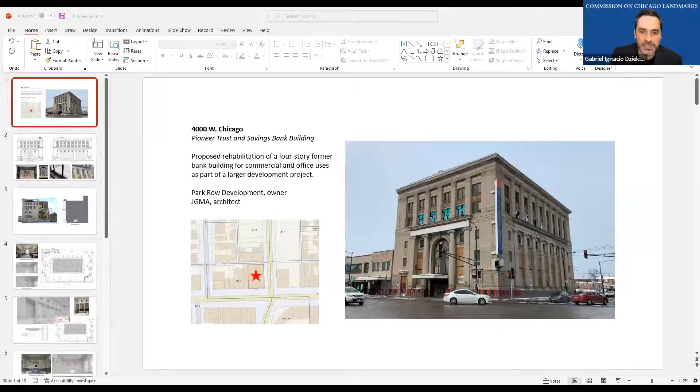And now here we go, we begin with our first project: 4000 West North Avenue, the Pioneer Trust and Savings Bank Building, Alderman Roberto Maldonado, 26th Ward, proposed rehabilitation of a 4-story former bank building for commercial and office uses as part of a larger development project. I believe Joyce Ramos has the presentation.

Thank you, Mr. Chairman. The former Pioneer Trust and Savings Bank Building was designed by architect Karl Vitzthum as a bank and office building with a gray granite base in the neoclassical revival style and was constructed in 1924.

It is a prominent site at the northwest corner of North and Pulaski Avenues. The bank building has sat vacant for almost 15 years. It is located in the Humboldt Park community area, and as part of the Invest South/West initiative, the building will be renovated as part of a larger development that will be a cultural hub and community center.

As part of the rehabilitation, the first floor banking hall will be retained to serve as an indoor market and event space, and the upper floors will be updated to serve as office spaces. The basement will be used as amenity spaces for the tenants. The significant...

historical and architectural features of the building are identified as all exterior elevations, including roof lines of the building, and the finished limestone return on the north elevation. Also the major historic interior spaces of the banking hall, including the overall spatial volume, columns, historic decorative floor, wall, and ceiling surfaces and detailing, historic decorative lighting, and the historic teller stations and check writing tables. Please note that the ordinance does allow for flexibility for the removal, relocation, or modification of significant features for the reuse of the building.

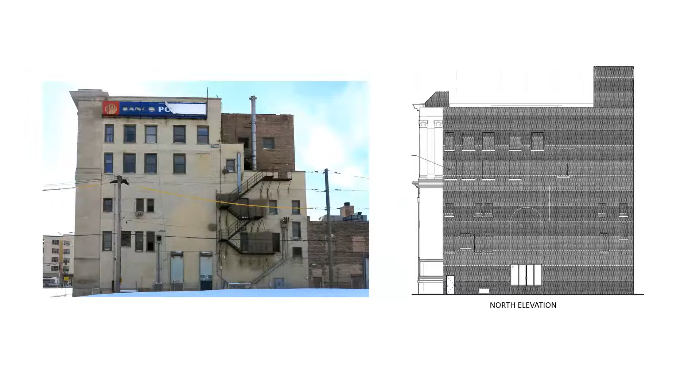Like many banks in the 1920s, the Pioneer Trust and Savings Bank had specialized interiors that included prominent teller counters, marble check desk, and geometric terrazzo flooring. Upon entering the building through the main doors along North Avenue is a short marble staircase that leads up to the 2-story banking hall that contains the historic marble and bronze teller counters, marble check writing desks, and the geometric pattern terrazzo floor. The plastered walls are finished to resemble weathered stone, and the coffered ceiling spans the entire space.

On the existing bridge that's within the South Apse, shown here on the photo on the left, a new code compliant glass guardrail will be installed inboard of the historic metal guardrail that faces north into the banking hall.

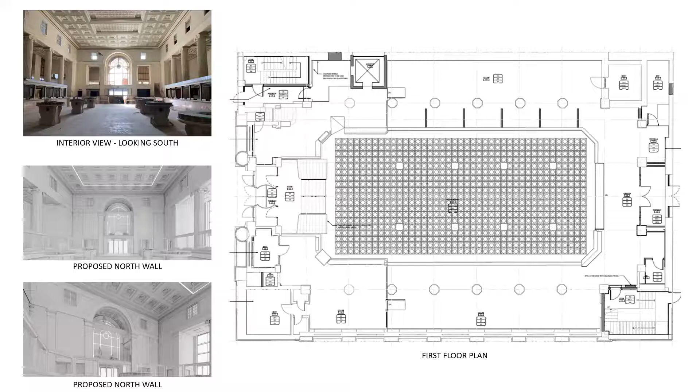For the first floor to be fully accessible, the secondary entrance circled here in the floor plan in red will be reconfigured with a new stair and elevator, highlighted here in yellow. It will be relocated to the north of its existing location. The architect had explored various locations for this elevator, but the proposed location provides access to all floors of the building while creating the least impact on the designated interior features.

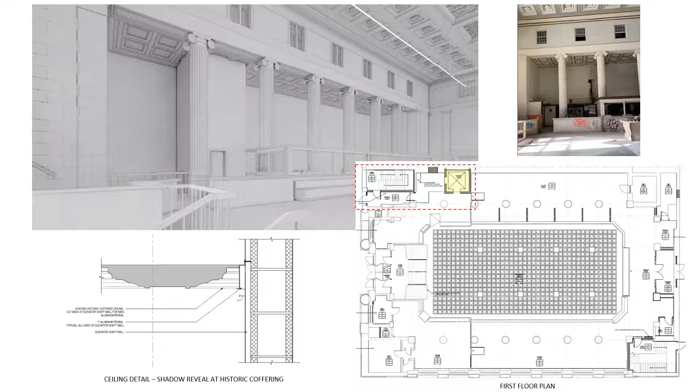The new elevator enclosure will penetrate the coffered ceiling, and a 1-inch reveal, shown here in the detail on the lower left, will separate the elevator shaft and the coffered ceiling. Staff recommends approval for this alteration.

A new bridge with glass guardrail, circled here in the red dashed line, will be constructed within the north apse to connect the east and west mezzanines. A portion of the historic coffered ceiling within the apse will need to be removed, and the width of this opening will be limited to 1 panel size.

Looking straight at the north apse from the banking hall level, this opening would not be apparent. However, the openings are visible when viewing from an angle. Staff recommends approval of these openings since they do not significantly alter the character of the interior space, and the glass guardrails do not obscure views of the walls behind it.

On the west elevation, the existing double hung windows will be removed. New punched openings will be made in the brick, and new windows are proposed to be installed on the 3rd and 4th floors. These windows will be visible from North Avenue above the roof of the neighboring buildings from the pedestrian level. The window openings are uncharacteristically large picture windows, and historic preservation staff recommends that the windows located on the second bay from the North Avenue elevation be reduced to have a similar opening size and window pattern found on the windows on the south and east elevations.

The windows on the west elevation located behind the recessed section can remain as proposed since they will be minimally visible from the public way.

To the north of the building are vacant parcels and an alley that is proposed to be vacated, which will be redeveloped into a multi-story building that includes parking, residential units, and shared community spaces. The new building will be located outside of the boundaries of the designated lot. It is not under the Commission's purview.

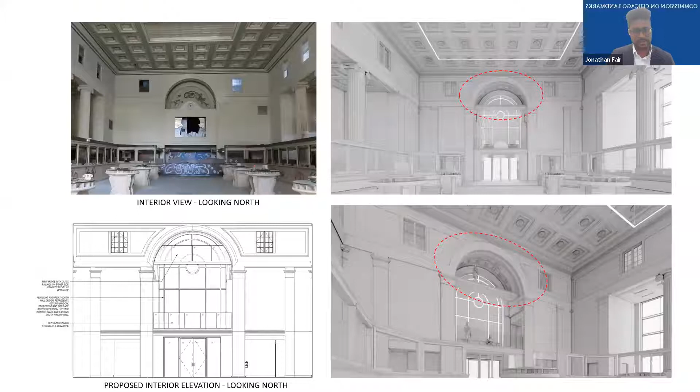I have maybe two questions. The first one being related to the southwest corner of the building where the stair and elevator are being reconstructed, with the roof access. I know the building as is has the existing penthouse at the roof, but from some of the historic photos, and even if you're out there now, I think it's only 8'6" or so, as documented in the drawings, that elevation is above the cornice.

Didn't see an elevation for the new penthouse that's going to be constructed, and just wanted to see if there was an elevation known, and just making sure, ideally if that's something from street view is hidden a little bit.

Yes, there are elevations that the architect did provide for these rooftop enclosures. The rooftop enclosures are just big enough for the stair and the elevator, and it's no larger than code required. So it would be visible from the street level, but since it's no larger than what's required by code, we do allow for these rooftop enclosures where they're proposed to be located.

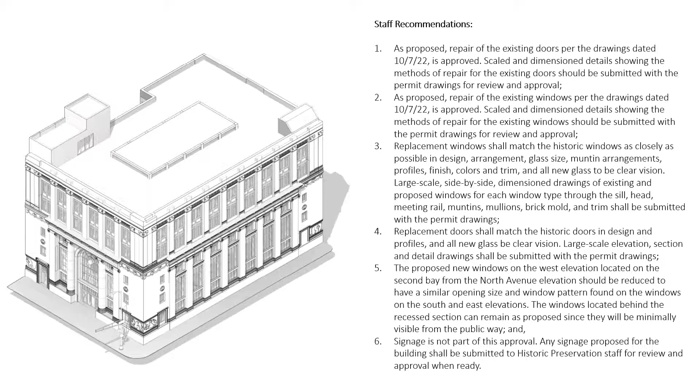Okay, I'll have to check back on that elevation, but thank you for that.

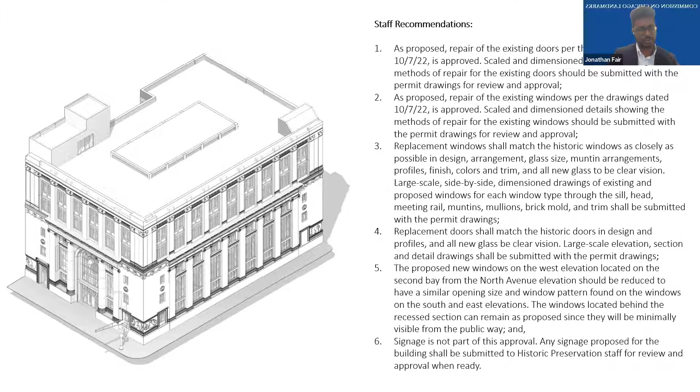The other point I made was more so of a comment, because I acknowledge and respect that it's out of our purview, but just acknowledging the significance and the prominence of this building along North Avenue and Pulaski, for the forthcoming development that's happening to the north. Keeping in mind not only the north elevation, but as you're approaching from Pulaski, the relationship between the existing structure and the development that's forthcoming.

I think what you all are setting up is a really nice language or dialogue of new and existing. I think some thoughtfulness there could go a really long way, but otherwise really, really exciting work.

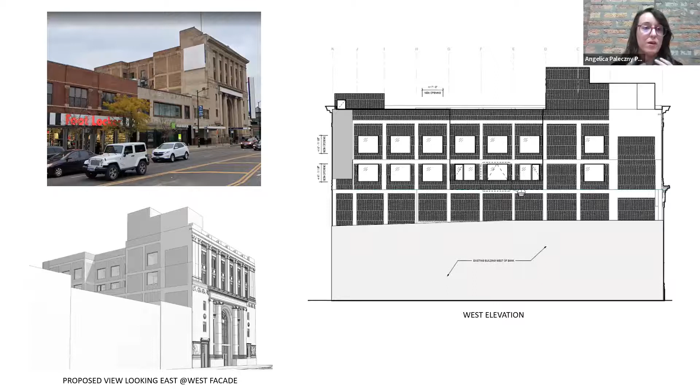I think that's a really great consideration. For us, the importance is making it a functional, bright, and lively office space, so the addition of the mullion is definitely something we can consider. Great, thank you.

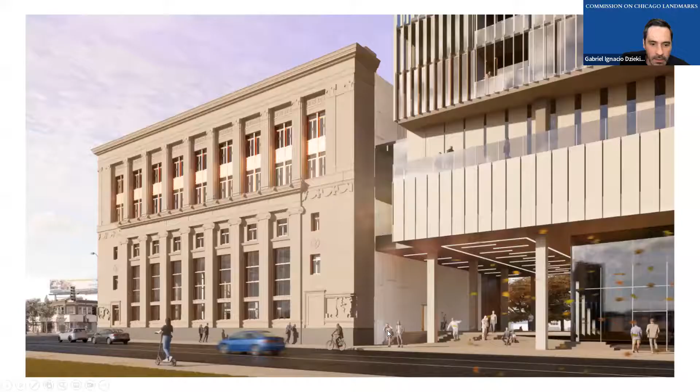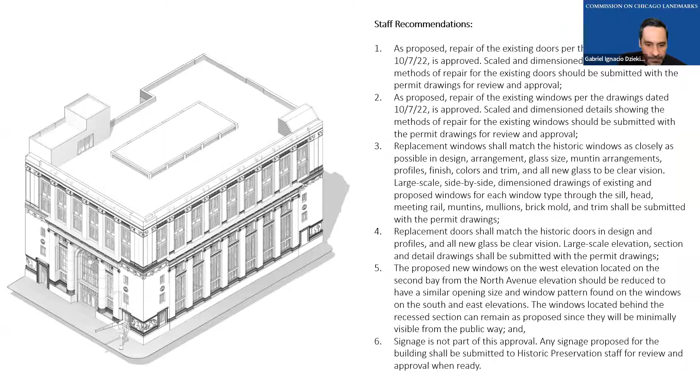Any other points of discussion, commissioners? Seeing none, I want to say this is a tremendous project and I'm excited to see it realized. Wonderful job, and it's exciting for the firm as well, for JGMA. Congratulations on getting this far.

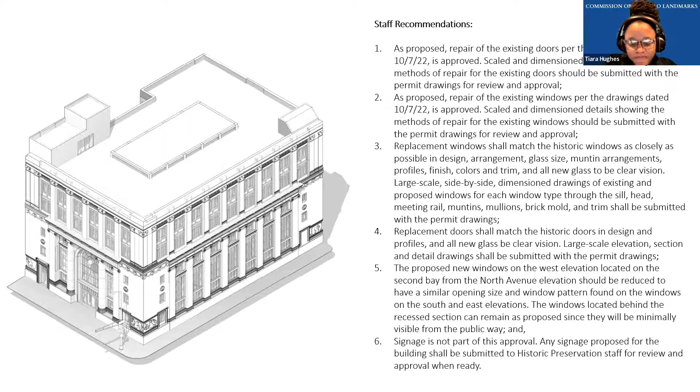If there's no further discussion, I'd like to request a motion to adopt the staff recommendation. It sounds like we have a compromise on the one bay on the west elevation. I motion that we accept all staff recommendations, including the mullion adjustment to the window discussed today. We have a motion—commissioners, do we have a second? I'll second it.

Seconded by Commissioner Rubin. We'll do the roll call. Commissioner Fair, yes. Commissioner Fair is a yes. Commissioner Ponce, yes. Commissioner Ponce is a yes, and I am certainly a yes. The motion carries unanimously.

Congratulations and good luck, we really want to see this happen. So very exciting.

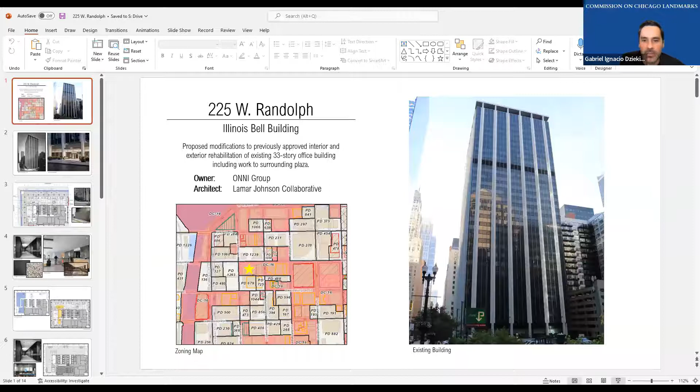The next project on the agenda is 225 West Randolph in the 42nd Ward, the Illinois Bell Building, Alderman Brendan Reilly. The proposed modifications are to a previously conditionally approved interior and exterior rehabilitation of an existing 33-story office building, including work to the surrounding plaza. I believe Emily Barton has a presentation.

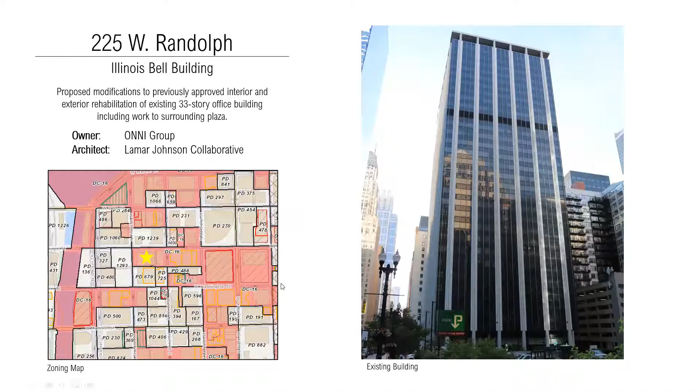Thank you, Commissioner. This is the Illinois Bell Building, an individually designated landmark. The significant features are all exterior elevations, as well as the surrounding plaza and the ground floor lobby. The owners are taking advantage of the Class L real estate tax incentive as part of their rehab project. In 2020, the committee reviewed and conditionally approved a proposal for the rehabilitation of the building, including work to the plaza and the designated ground floor lobby. The applicant is now proposing changes to the scope of work and has submitted revised plans for PRC review and decision. Changes include lobby modifications, a new rooftop addition with roof deck to accommodate amenity space, replacement of the building's vision glass cladding, and replacement of non-historic finishes in the plaza. I'll go through these changes now.

The original plaza paving was removed at some point in the past, and the applicant is now proposing to replace the existing non-historic exposed aggregate concrete pavers with new pavers matching the color and texture of the historic paving based on photographs. The new paving is proposed to extend out to the property line, outlined in blue, whereas the original stopped at the outside edge of the historic planters. The applicant proposes this change to further incorporate the historic planters into the plaza. Because the applicant will be creating a custom blend of exposed aggregate concrete, they have not yet received a final sample. Staff recommends that when ready, the plaza sample be submitted to staff for approval.

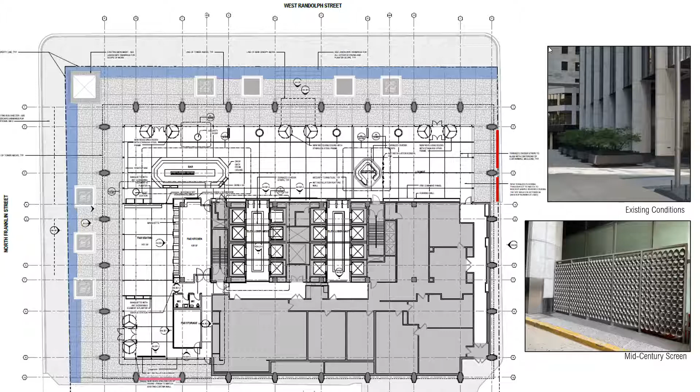On the east end of the Randolph elevation is an original exterior mid-century styled metal screen, lined in red on the map. This screen was installed to block views of the alley from inside the lobby. The applicant proposes to replicate this screen, shown outlined in pink, for the south end of the Franklin elevation to alleviate the same condition. Because this new screen will not penetrate or obscure any historic features and is proposed for the same reason as the original, staff recommends approval as proposed.

Volume and finishes in the main lobby have been substantially altered from their original appearance. The west end of the lobby has been partitioned into a separate restaurant space with non-historic partitions and finishes. The remaining lobby space along West Randolph was remodeled in 1989. The original black granite wall panels in the main lobby and elevator lobbies were replaced with marble and wood paneling, and new gray and black terrazzo flooring was installed. The lobby ceiling is a non-historic gypboard ceiling with floating gypboard ceilings in the elevator lobbies.

The revised scope of work eliminates the stair insertion that was proposed in 2020 and includes replacement of the existing gray and black terrazzo flooring with new gray terrazzo with a polished finish to match the original, as shown in historic photographs, with divider strips forming a grid that aligns with exterior structure and plaza pavers. The non-historic marble and wood wall panels in the main lobby and elevator lobbies will be removed and replaced with black granite to match the original, based on historic photographs and using the existing black granite at the base of the exterior columns as a reference.

The material proposed for removal is non-historic and the changes are based off of the original drawing set. Staff has reviewed replacement materials for this new flooring and wall coverings on site and recommends approval of the proposed stone sources: Cambrian black brushed granite and Amici Terrazzo sample AT2402.

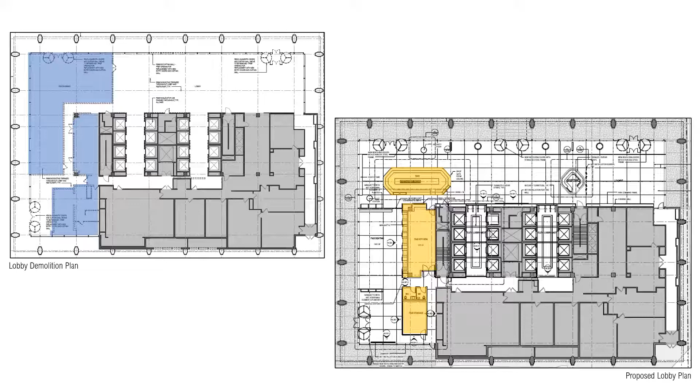Originally, the building featured a monolithic drop ceiling featuring a dramatic soffit at the building perimeter. The existing non-historic ceilings throughout the lobby and elevator lobbies will be removed and replaced with new drywall ceilings, returning to the original perimeter soffit and 12-foot height.

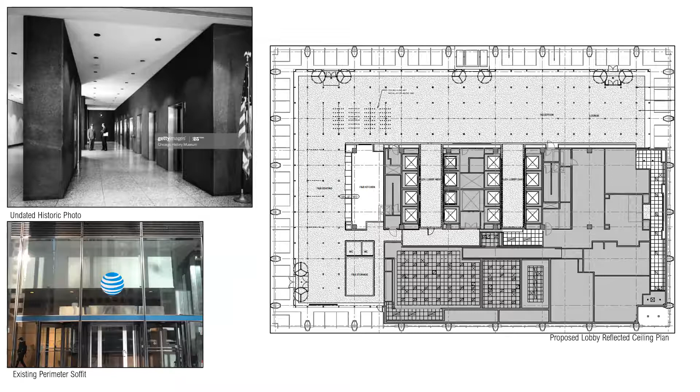Previously, the committee approved a new central building entrance along Randolph and a new canopy. The applicant is now proposing to replace the existing 7-foot tall revolving doors with new 9-foot tall revolving doors, largely matching the original design. Above these new doors, the applicant proposes a new curtain wall and mullions to match the existing in finish, reflectivity, color, and profile.

As before, at the Randolph Street facing side, a new center entry is proposed to funnel office workers directly in and up. Two new revolving doors matching the height and design of the other revolving doors are proposed to be inserted into the middle bay along the Randolph Street elevation.

This entry has been designed to fit seamlessly into the historic storefront and will sit below a new mid-century inspired canopy, approximately 1 foot 4 inches thick, which is thinner and less intrusive than the previously approved 2.5 foot canopy. The canopy is proposed to be structurally attached to the building floor plates and will cantilever out, which will avoid the need to directly attach to the historic exterior. Building address signage and downlighting will be incorporated within this canopy.

Staff recommends approval of all of these ground floor storefront changes with the condition that canopy material samples and details showing the profile and alignment of the new glazing and mullions be provided with the permit application.

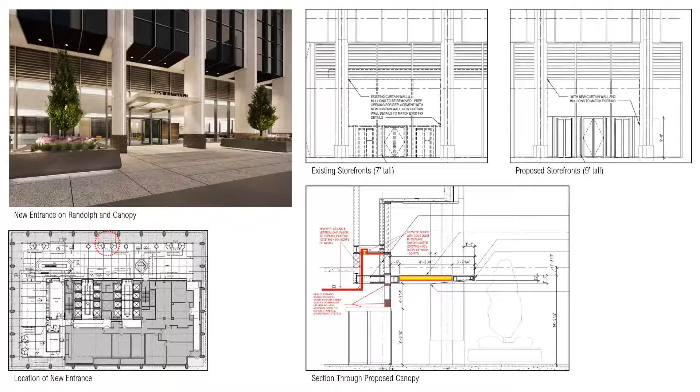Just to describe the existing curtain wall for you, the building features alternating rows of tinted vision glass and an opaque transom glass or spandrel glass.

As part of the new scope, the applicant is proposing to replace the entirety of the tinted vision glass on the building to increase energy efficiency. They provided proposed and existing details, including the original details from the historic drawing set, in order to evaluate the impact of replacement. All exterior mullions are to remain, and no modifications to the existing curtain wall framing will be required. The corner detail will be an identical match to the as-built condition, and the applicant is proposing to retain and reuse the historic black arrowhead corner extrusions and zipper gaskets.

There is a slight dimensional difference between the existing and proposed center mullion details. In the original, there is an approximately 1/2 inch to 3/4 inch caulk joint connecting the glazing to the center mullion. In the proposed detail, the window bar and backer rod and seal are closer to 1 1/4 inches thick.

A mock-up was conducted by staff to evaluate the visual differences between the original glazing and the new proposed replacement glazing, and staff determined that the 1/2 inch to 3/4 inch difference is not noticeable at all from the outside. Staff further found that the reflectivity, color, and finish of the new glass matched the original glazing very closely and recommend approval of the Alliance Glazing Technologies glass as proposed.

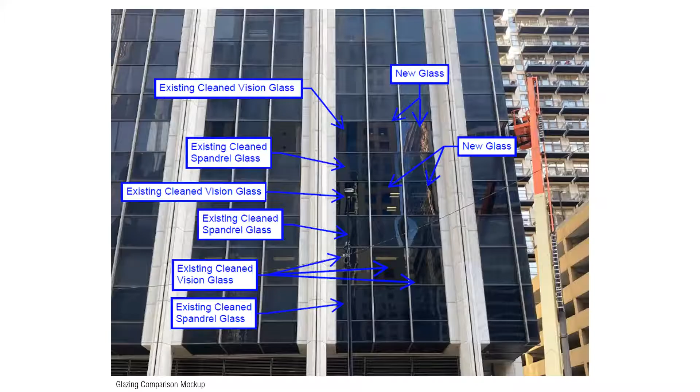The revised scope of work proposes to utilize a portion of level 31 for amenity space. To make this area functional for the proposed use, the existing louvers of the portion outlined in yellow will be removed and replaced with tinted glass. Because the louvers are recessed and are located at the top of the building, they read as a dark void. Therefore, staff recommends that the installation of tinted glazing will not be a noticeable change to the exterior of the building when viewed from pedestrian street level.

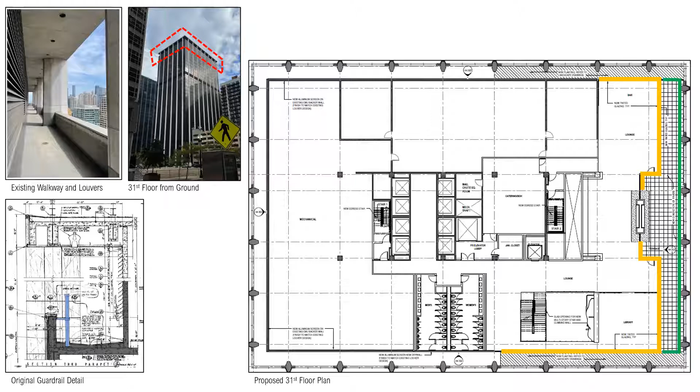A new metal and glass guardrail will also be installed along the parapet at level 31, shown in green, in the same general location and at the same general height as the railing that was shown in the original drawing set.

To accommodate more new amenity space, the applicant is proposing a new rooftop addition with roof deck. The addition will primarily be 14 feet tall, shown in yellow, and will be located on the south and east sides of the existing roof penthouse, shown in blue. The addition will be set back approximately 13 feet from the south edge of the parapet and 16 feet from the east edge of the parapet.

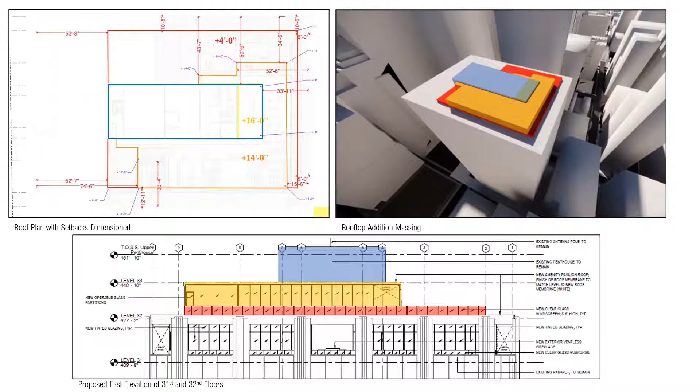A roof deck will wrap the east and north sides of the penthouse, set back 8 feet from the east and 10 foot 6 inches from the north. The deck is proposed to be surrounded by glass guardrails 3 feet 6 inches tall, shown in red, and a low maintenance 4-inch green roof tray is proposed to border the addition and deck on all sides.

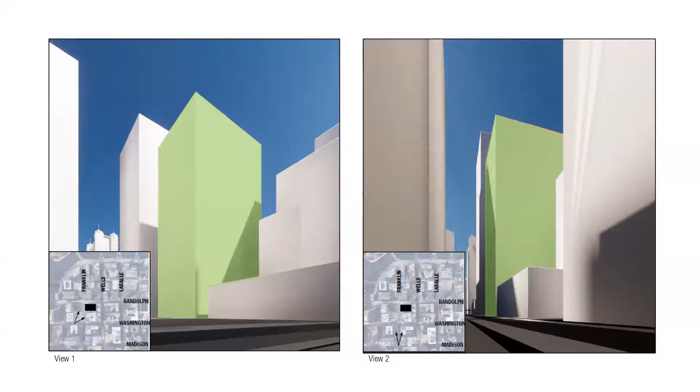Staff recommends that based on these visibility studies and the setbacks proposed, the new rooftop elements will not be an adverse effect to the building, and all proposed rooftop materials shall be submitted with permit application. A statement of no opposition has been received from Alderman Reilly's office, and I believe we have the development and architectural team here to speak if you have any questions.

Thank you, Emily, for the very clear presentation. Any questions for Emily before we go to the applicant? Commissioners? Seeing none, let's hear from the developer. Can we please hear from Brian Bradeur?

I had a question, sorry. Go ahead, Commissioner Hughes. My question was, was any of the work previously approved performed in 2020, or did everything stop, I'm assuming, because of the pandemic? I think the developer can clarify, but my understanding is that nothing was done. It all just kind of got stopped before the work could get started.

Brian Bradeur speaking for the Ani Group. We're the owner, developer, and general contractor. Thank you for having us. To answer the first question, we actually closed on the building in 2020, in early 2021. Some demo permits have actually already been filed, and we've actually already begun elevator modernization work and a couple other things. So work has already been done on this project. The reason we're back here today is just for the alterations set forward in the presentation.

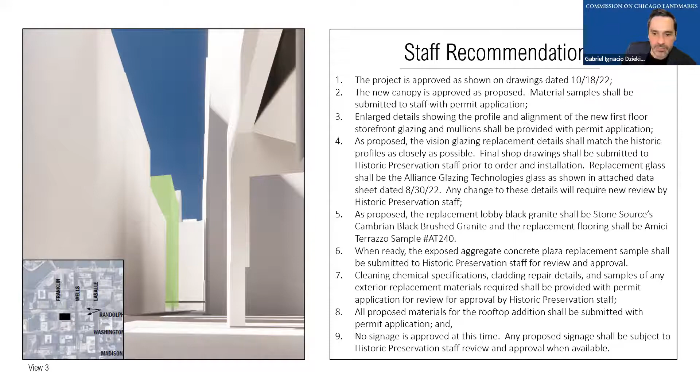Commissioner Ponce? Yes. Commissioner Ponce is a yes. Commissioner Rubin? Yes. And I am a yes, and the motion carries unanimously. Congratulations, and we look forward to seeing the project come to fruition. Thank you.

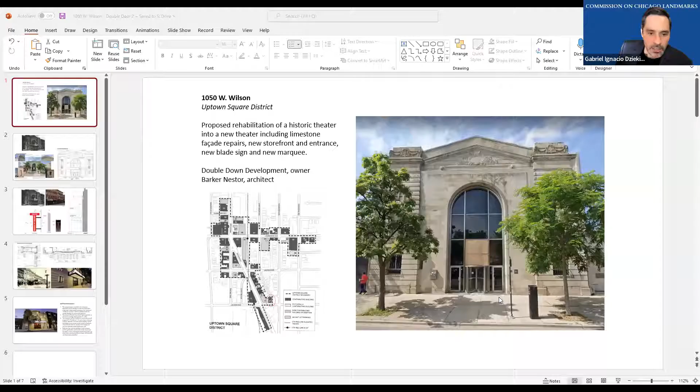1050 West Wilson is the next project, 46th Ward, Uptown Square District, Alderman James Cappleman. The proposed rehabilitation of a historic theater into a new theater, including limestone repairs, facade repairs, new storefront and entrance, new blade sign, and new marquee. Joyce Ramos has the presentation.

Thank you, Mr. Chairman. The Wilson Avenue Theater was erected in 1909 and was designed by architect Henry Ottenheimer in the classical revival style. It was the oldest theater in the district and was converted into a bank in the 1920s. After years of being used as a commercial space, the building will be redeveloped back into a theater as the new home of the Double Door Theater.

This is a contributing building in the Uptown Square District, located at the very eastern boundary on Wilson, just east of Broadway. The period of significance of the district dates from 1901 to 1940. The significant features of the district include all exterior elevations, including roof lines of the district buildings visible from the public right of way.

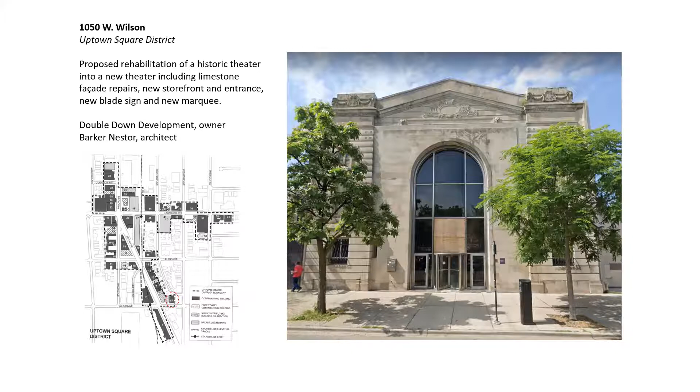The building's primary street elevation faces Wilson Avenue and is clad with limestone, which is proposed to be patched and repaired. A new storefront and entrance will be installed in the existing arch opening. Based on historic images, the building originally had a decorative limestone facade with a large canopy covering the entrance, and the facade was later modified to include an arched window opening on the second floor.

Historic preservation staff recommends approval for the replacement of the existing non-historic arched storefront system and entrance door within the historic opening, with all new glass to be clear vision glass. Large-scale dimension drawings of the proposed storefront and doors shall be submitted with the permit drawings for review and approval.

The applicant is proposing to install a 17-foot tall new blade sign with halo-lit letters and incandescent bulbs. The design is based on the original double door sign installed on the venue in Wicker Park, and it will be supported by steel tubes attached to the new storefront system.

Based on historic images, a historic blade sign was hung off the limestone facade in 1910 when the building was the Vaudeville Theater. Historic photos show a large clock and blade signs projecting off the front facade as well. Historic preservation staff recommends approval of the proposed double door blade sign to be installed in the same location, since there is historic precedent for signage projecting off the facade, and the attachment locations will not impact any historic material.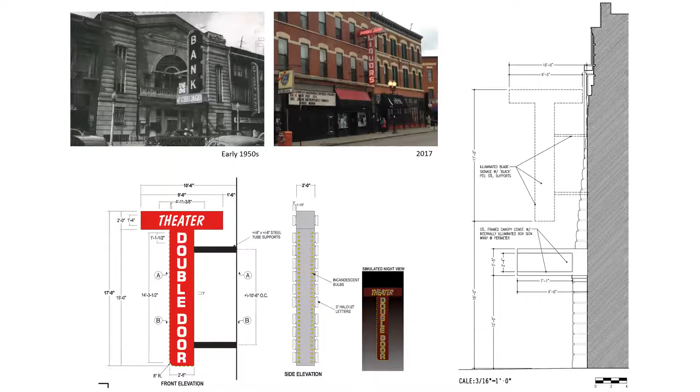The applicant is also proposing to install a new marquee, 31 feet 6 inches wide by 9 feet deep and 3 feet 5 inches tall, projecting over the entrance. The width is based on the historic canopy installed when the building was the Vaudeville Theater, which spanned the inset center section of the facade between the projecting corners. Instead of tiebacks like the historic marquee, the proposed marquee will be supported by interior beams and floor assemblies.

The three elevations of the marquee will incorporate white backlit signs with individual black letters, which will be changed based on the scheduled events of the venue. The underside of the marquee is proposed to be illuminated with surface-mounted socket-style light fixtures attached to a decorative tin ceiling.

The overall form, width, and projection of the proposed new marquee is similar to the historic canopy installed on the building in the 1910s, and a historic photo shows that marquee signs were later added to the top of the canopy. Staff recommends that installing a marquee on this facade is appropriate.

However, the proposed overall height is not proportional to the building. There are other theaters within the district that have large marquee signs, and the size of these signs is consistent with the size of the buildings. Staff recommends reducing the overall proposed height from 3'5" to 2'6" to be more in keeping with the character and scale of the building.

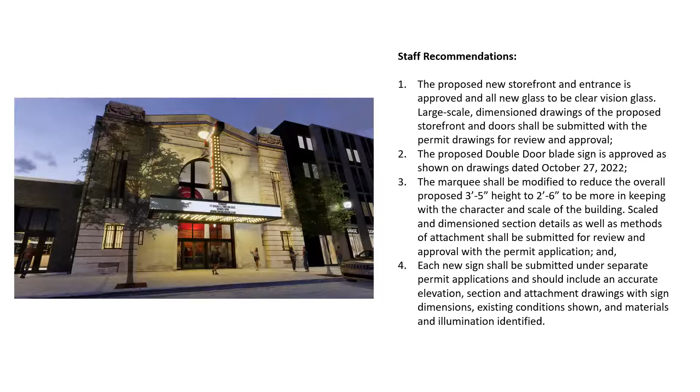And so getting it under 3 feet would be very difficult if we were going to cantilever it and reduce the amount of demolition for installation. So we were wondering if maybe there was another way to address the character and proportions of this marquee, and maybe make it not just a big black box that's as minimal as possible, but add some articulation on the top and bottom, inset the signage a little bit, soften the proportions, and keep the depth at least 3 feet so we can continue to cantilever, if that might be amenable.

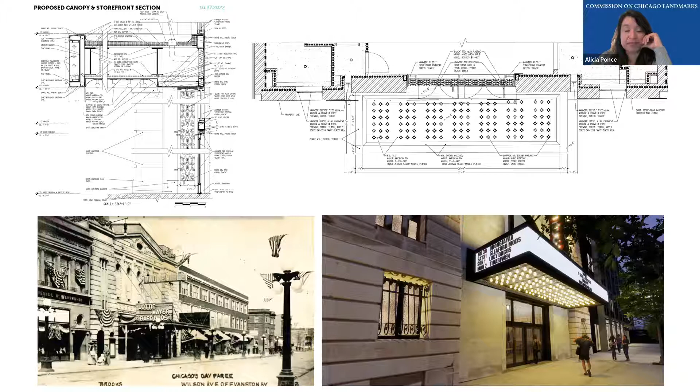Okay, Commissioner Ponce has made a motion. Do we have a second? In addition to her motion about the heights, also the materiality to be further explored with our staff. I second.

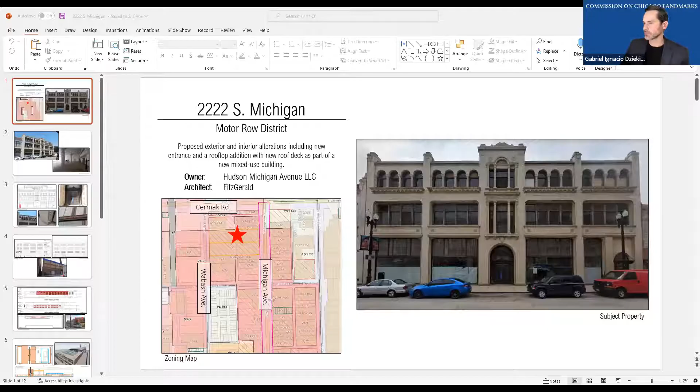Yes, thank you, Commissioner. So the subject property is the historic Hudson Motors showroom located mid-block between Michigan and Wabash, south of Cermak Road. This is moving forward as a planned development and is scheduled to appear at the November Plan Commission meeting. This building is contributing within the Motor Row District, and the significant features are elevations and roof lines visible from the public rights of way.

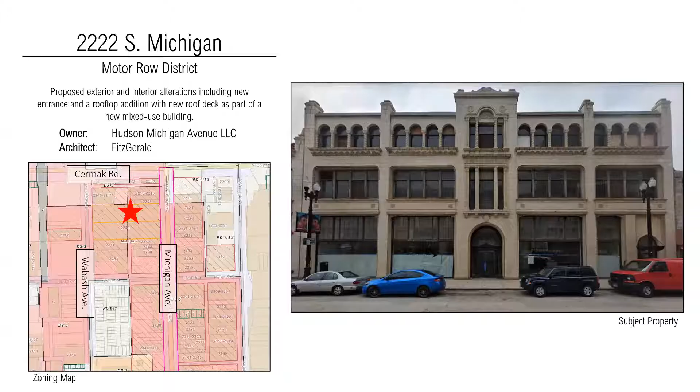The proposed project involves the full interior and exterior rehabilitation of the historic Hudson showroom building. The building will be mixed use in programming, including a restaurant on the 1st floor, a speakeasy bar in the basement, and a rooftop entertainment space. The other floors will be residential multifamily housing and micro-unit hotel rooms.

The applicant proposes window restoration of all of the historic single-hung wooden windows on the eastern facade, the main facade facing Michigan Avenue. To meet code requirements, the applicant proposes to add another entrance on the northern side of the facade, shaded in red. This will be recessed like the main entry and much simpler in design, so as not to be confused as a historic feature or detract from the surrounding historic architecture. Staff recommends that this design and location will not have an adverse impact on the building.

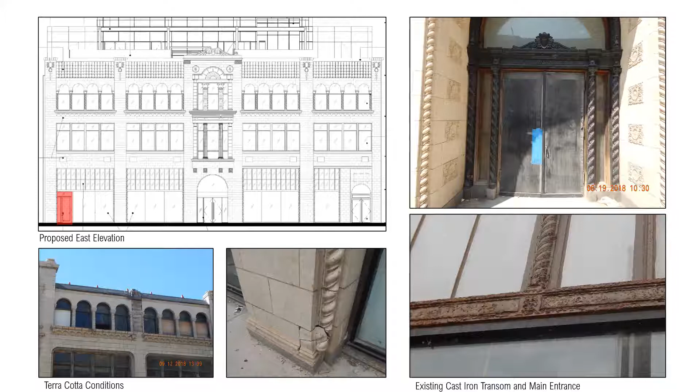The applicant proposes to restore the remainder of the cast iron storefronts, including the decorative entry frame on the main central entrance. The east elevation is clad entirely with white-flecked terracotta. There are several condition issues present, and the applicant proposes to repair, repoint, and clean the historic facade. The historic clay tile roof is also proposed to be restored.

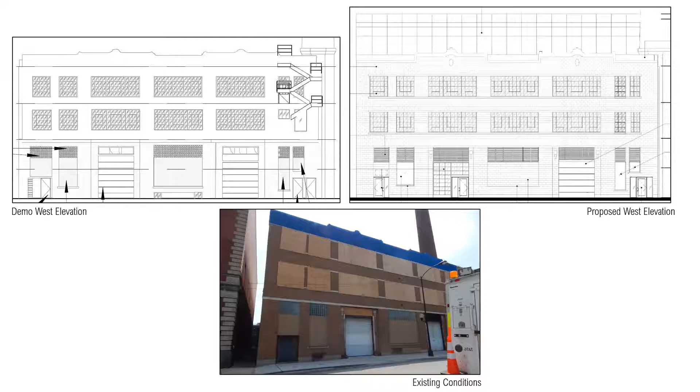Because the building spans an entire city block, there are two street-facing elevations, and the western Wabash elevation is much plainer in design, with brick cladding, a simplified entry, and loading doors. On this elevation, the existing steel windows are in very poor condition, and the applicant proposes to replace them with new steel windows closely matching the original profiles and operation.

The ground floor has been substantially modified in the past, and there are currently two overhead garage doors with glazing above and two entry doors, one on each end of the facade. The applicant proposes removing all of the doors as well as the non-original brick infill on the first floor. The existing rear fire escape is proposed for removal, and new windows will be inserted at its location on the second and third floors to align with the historic masonry openings.

The leftmost garage door will be replaced by a new storefront and entrance, and the non-historic infill will be replaced with either new glazing or new masonry infill to match the existing brick. The non-historic man doors will be replaced with new doors and glazing.

On the north elevation, in order to accommodate light and vent requirements, the applicant is proposing to remove a central portion of the second and third floors, approximately 215 feet in length, on the side common brick elevation. This removal will be located approximately 111 feet from the front facade and will be 20 feet deep. Because this elevation is very minimally visible from the public rights of way, staff recommends that this will not exceed or even near the 40% threshold requiring CCL and City Council review.

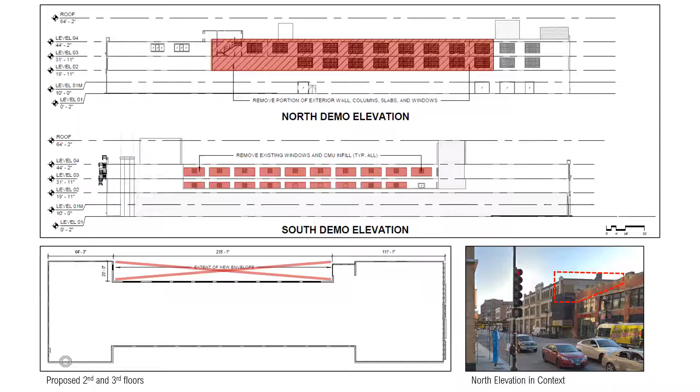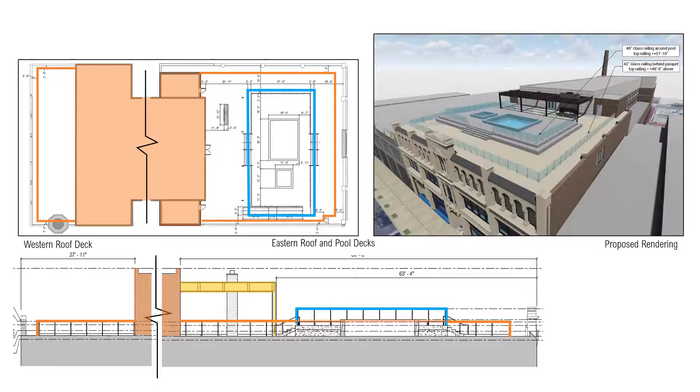Staff recommends that due to the minimal visibility from limited vantage points surrounding the building, the proposed addition, pool deck, and railings will not have an adverse impact on the building. Staff further recommends that samples of the rooftop cladding material should be submitted with the permit application. I'm here if you have any questions, as are members of the development, architectural team, and their attorney.

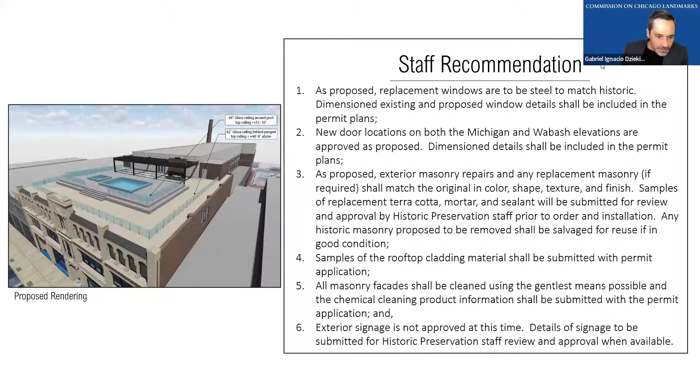All right. 2025 West Evergreen, the first ward, the Wicker Park District. Alderman Daniel La Spata, proposed construction of a 2-story rear addition, a 1-story side addition, and construction of a new 1-story rear brick garage. And I'd like to call on Joyce Ramos for the presentation.

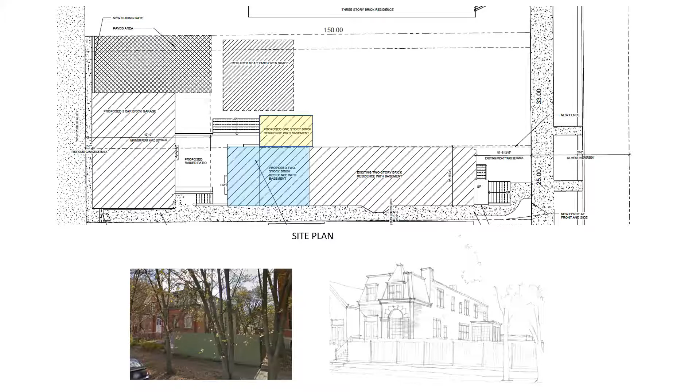The existing solid wood fence in the front of the yard is also proposed to be removed and replaced with a new 5-foot tall ornamental fence, which you can see in this sketch. The side addition is proposed to be set back approximately 55 feet from the front facade. It is 16 feet above grade in height with a flat roof, and is proposed to be clad with fiber cement paneling with a brick base to match the brick on the historic building.

The facade will have large punched openings infilled with divided light windows. The first floor deck and railing is located behind the side addition but will be completely screened from view. In contrast to a more solid masonry addition, a mostly glazed enclosure may be seen as an ancillary structure to the main residence.

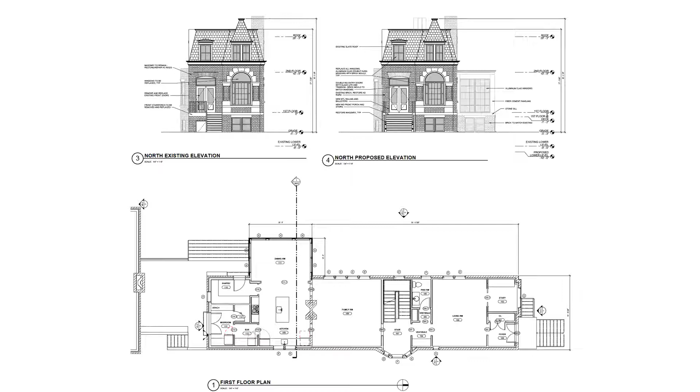In June of 2020, the committee approved a proposal for a side yard addition at 2115 West Evergreen, similarly situated at the rear of the historic building with a single-story addition projecting in the side yard. Also in July of 2007, the committee approved a side yard addition at 1646 North Leavitt, similarly situated on a double lot. Staff recommends that the proposed side addition will not adversely affect the architectural character of the building or the district.

The applicant is also proposing to demolish an existing non-historic one-story frame garage at the rear and replace it with a new one-story three-car masonry garage with alley access. It will be clad with brick to match the historic home. The district contains a number of properties with historic rear structures, such as coach houses or garages, that embody the same historic architectural characteristics that define the district. A portion of this proposed new garage will be visible in the west side yard, but staff recommends that the materials and details are compatible with the historic character of the district and recommends approval as proposed.

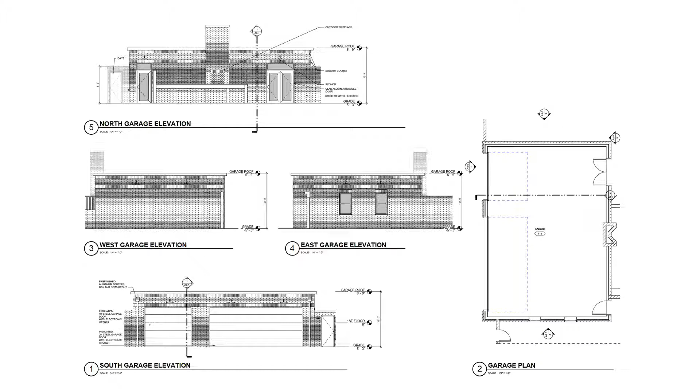In conclusion, the side addition connects only to the new rear addition, with its contemporary design utilizing large divided light windows and fiber cement paneling. Since these additions are located at the rear of the home and do not connect to the historic building on elevations visible from the public way, staff recommends that the massing and materials be approved as submitted.

The Wicker Park Committee has reviewed the project and submitted a letter of support. The architect is also here. Please let us know if you have any questions.

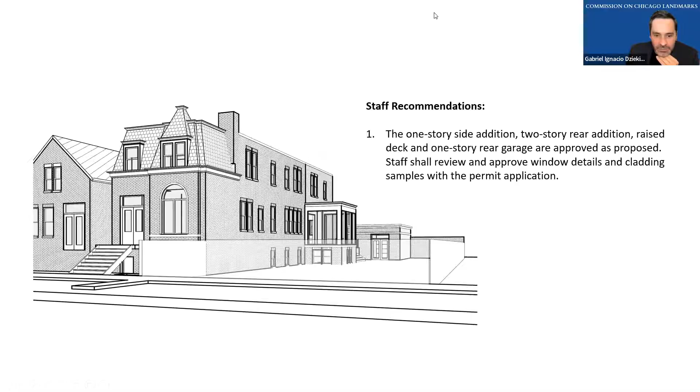2618 North Milwaukee, Logan Square Boulevard District, 35th Ward, Alderman Carlos Ramirez Rosa. We would like to call on Emily Barton for the presentation.

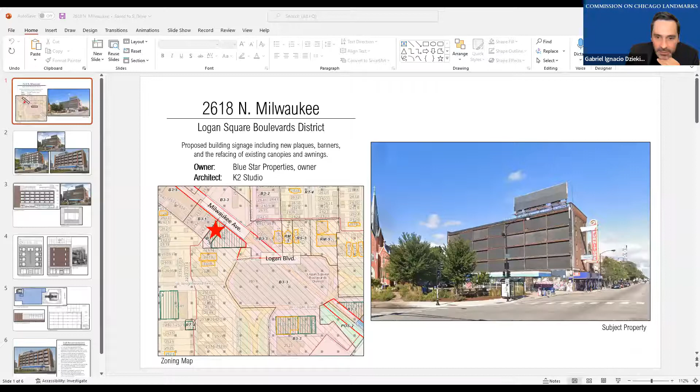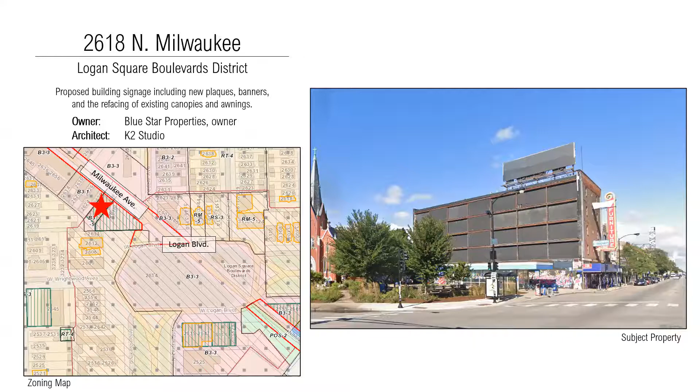Thank you, Commissioner. This building is the five-story building at 2616 to 18 North Milwaukee, built in 1914 as a storage warehouse and located just north of Logan Square Park. This property has gone through many project proposals, but none have moved forward, and thus the building has sat vacant for decades. The applicant is proposing to modify a previously approved plan for the existing vacant building from a hotel use to a gym use.

The project will largely retain the existing five-story building, which was preliminarily found to be non-contributing by the committee in 2020. There will still be elements of new construction, including a new stair and elevator core at the rear of the building and a new sixth floor rooftop addition and deck, both of which were included in the original proposal.

The majority of the proposed changes from the 2020 submission are on the south facade. This elevation is currently just a steel structural frame with plywood infill after the facade was demolished in early 2017 for being imminently dangerous and hazardous.

The previously approved proposal called for rebuilding this wall with new face brick to match the front facade, and the insertion of new fixed and operable windows.

This new scheme proposes 28 masonry openings, approximately 7 feet tall by 14 feet across. The windows are fixed and are 7 bays across, matching the existing structural grid, and are primarily inspired by Chicago-style windows. Metal panels act as spandrels, separating each floor, and feature some detailing to appear more compatible with the district. The ground level storefront design has not changed from the 2020 approval.

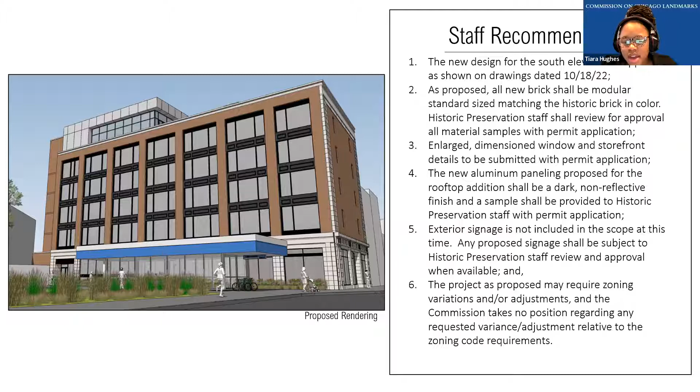Yes, I agree. I just want to say I agree and concur with the comments of Commissioner Fair with recommendation number 4. And I don't know if I missed it in our packet, but in this presentation, on this elevation, it seemed like the previous proposal had some type of brick cladding on the top, and I was just curious why that was removed. Can you go back, Emily, to the 2020 image? I'll send that question to the architecture and development team. Yeah, the top portion of it, the 2020 approval, I'm just curious as to how.

I can wait. Matt, would you like to take that one? Sure, there are probably a couple reasons, but the main driving factor was... Could you please introduce yourself? I apologize. Yeah, Matt Coopers from K2 Studio.

We worked on the original and we're working on the current proposal in front of you. The process went through local review again, in this case LSP, Logan Square Preservation, landmarks and so on. In that process, one request was to take the cornice line that sat atop the 5th floor and emphasize it, having it run the length of the building along the main south elevation. The 6th floor, which is reminiscent of the elevator overruns, stays separate in its articulation. So you get the strong cornice line on top of the 5th floor, and the 6th floor addition is a piece unto itself.

Got it, yeah that makes sense. Thank you for clarifying. Thank you. Commissioner, any other questions?

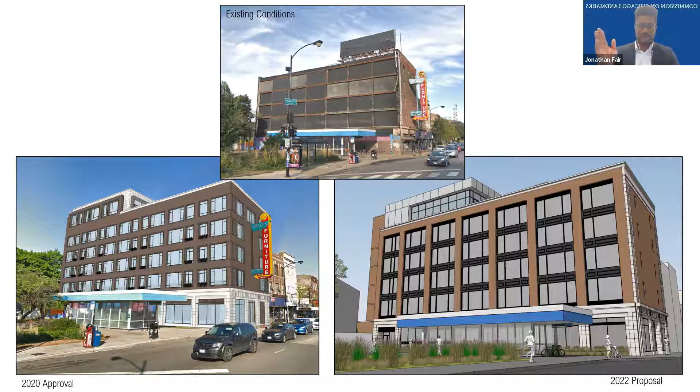I wanted to chime in on Commissioner Hughes' point. If you look at the elevations of that facade, it may be something addressed with some of the masonry work to create a datum along that facade. Right now that cornice along the main facade ends at the corner, which is typical, but it would be nice to have an element that carries that line forward rather than just stopping where the storefront walls begin.

I don't have all my bearings straight on this, but further to what will be the left side of this image, you start to see some datum lines set up in the masonry. You may speak to some of the joining, but that may be an opportunity to carry that across and tie it over to the cornice that's there - something to weave the two together, which are currently doing two different things but could have a better relationship.

This is Dave Deuter with Blue Star Properties, the developer and general contractor. Matt, I'm going to take a stab at trying to address where we've been on this. Correct me if I'm wrong with anything. Can everybody hear me okay? Great, okay.

What I'm going to call the top foot or so of the cornice on both the Milwaukee facing side of the building and the square facing or south side of the building, we're effectively trying to look at that element as the same, carrying through on both elevations.

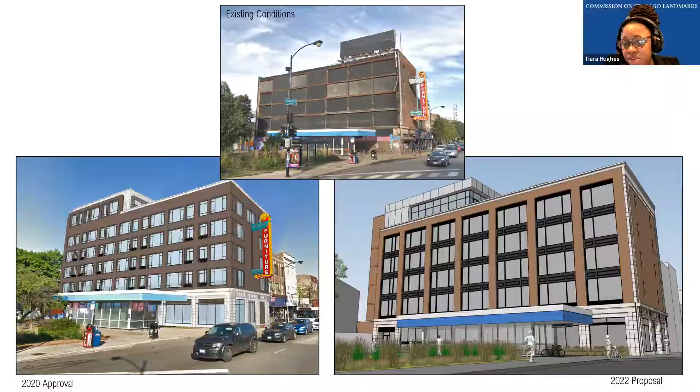And I do see that you guys are approaching the facade - is this the Milwaukee side, Emily? Yes, so you guys are approaching - sorry, I'm looking at the map now - the Milwaukee side with a minimally invasive approach, which is different from your 2020 proposal. I can appreciate that you've added this ornamentation around the edges to help still nod to some of the original historic character it had.

Thank you. Thank you, Commissioner Hughes, Commissioner Fair. Thank you, Mr. Duder.

Any other questions? I really like the scheme, the revision. I think it's really well done, that you're completely bringing back the south elevation. And it looks like a very natural way to turn the corner, really respecting the old facade, and trying with the new facade being modern, but yet almost looking like it was there all the time. I think it's really well done.

So with that, any other points of discussion, commissioners? Seeing none, I'd like to request a motion to adopt the staff recommendation. Do we have a motion?

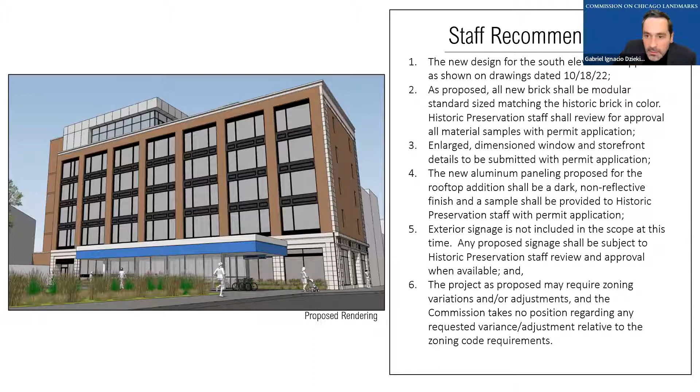Thank you very much. All right, the seventh item on the agenda is 3300 and 3304 South Giles, Fourth Ward, Calumet Giles Prairie District, Alderman Sophia King, proposed two new two-story single-family residences and detached two-car garages. And Joyce Ramos has the presentation.

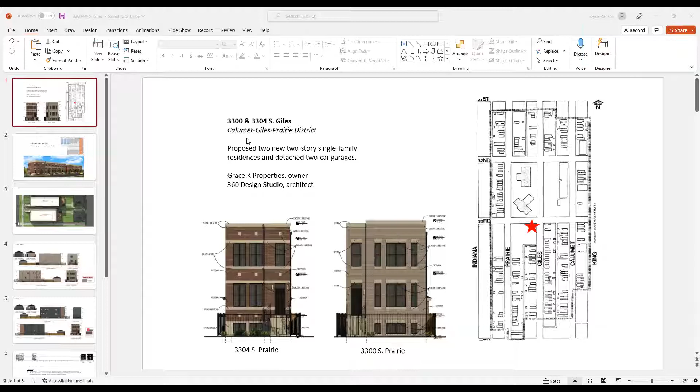Just a little background information on the site. In 2005, the Permit Review Committee reviewed and conditionally approved a development on the former Glass Globe Factory site, in the northernmost portion of the block located just south of 33rd between Prairie and Giles, that included an overall plan for 18 new buildings. The multi-unit development included a mixture of single-family residences, attached row houses, and 3-unit and 6-unit condominium buildings.

Of the 18 new buildings approved in 2005, 5 have been constructed. Also, the significant features in the Calumet Giles Prairie District are all elevations visible from the public right-of-way, including roof lines.

In 2018, 2 5-unit townhouse buildings were proposed on 227 to 235 East 33rd and 237 to 245 East 33rd. These were reviewed and conditionally approved by the Permit Review Committee. The townhouses located at 237 to 245 were constructed. However, according to the developer, they were difficult to market and sell. So while all the units were ultimately sold, the project was not financially successful.

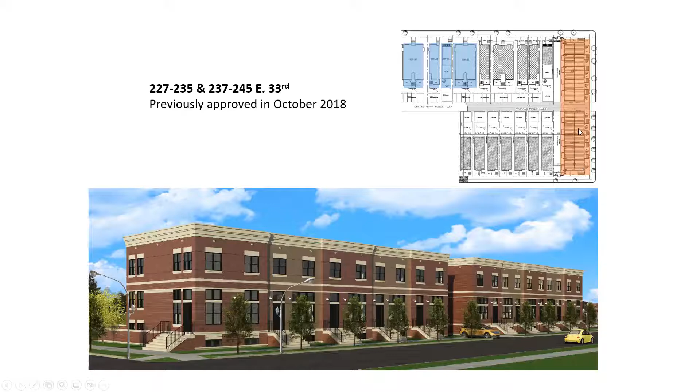Therefore, the developer has decided to change the previously conditionally approved townhouses on 227 to 235 East 33rd, which is the subject site for this presentation, to 2 single-family residences. This site is now referred to as 3300 and 3304 South Giles.

I'll talk about these 2 buildings separately. The proposed 2-story masonry building at 3300 South Giles is 24 feet in width and 54 feet in length with a front yard setback of 14 feet 11 inches.

The proposed 2-story masonry building at 3304 South Giles is 19 feet 6 inches in width and 60 feet 8 inches in length, with a front yard setback of 14 feet 11 inches.

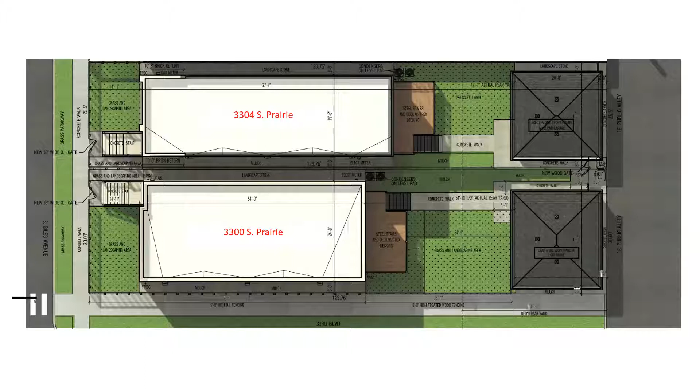The building proposed at 3300 South Giles features single and gang double hung windows with stone lintels and sills. A limestone cornice with a slight projection is proposed to cap the building. The front elevation has a raised entry with a stoop height of 5 feet 6 inches above grade, and the facade is clad in modular size face brick.

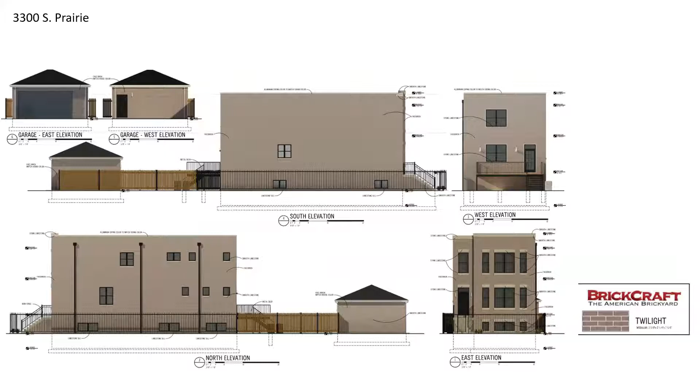The side and rear elevations will also be clad in the same brick, and the proposed brick is from Brickcraft in the twilight color, with stone detailing that also matches the typical colors and textures found within the district.

For the building proposed at 3304 South Giles, this building features gang double hung windows with stone lintels and sills. Historic preservation staff recommends a limestone cornice with a slight projection to cap the building, with limestone belt courses above and below the windows. The facade is embellished with decorative inset stone squares, and limestone cladding will be used at the base.

The front elevation has a raised entry with a stoop height of 5 feet 4 inches above grade, and is clad in modular size face brick with a 10 foot 8 inch wrap on the north and south elevations. The proposed brick is Brampton brick in the color brown velour.

Since the side elevations will be visible, staff recommends increasing the length of the brick wrap on the side elevations to a minimum of 15 feet. Staff further recommends that the fiber cement siding be modified to more closely match the color of the face brick and have a smooth finish.

For both buildings, the windows, doors, and stoop heights are similar to other historic buildings in the district, with exterior cladding materials typically found within the district, and the height is also within the historic range of heights found within the district.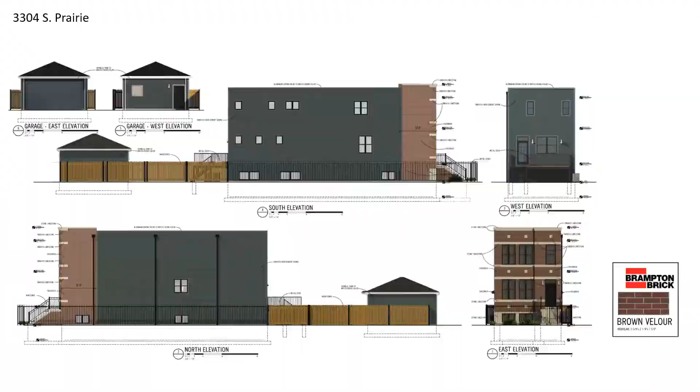In conclusion, staff recommends approval for both projects with the conditions mentioned during the presentation and listed on this slide. The aldermen and the community group have both reviewed the proposal and provided letters of support that were included in the packet.

The architect and developer are both here. Please let us know if you have any questions.

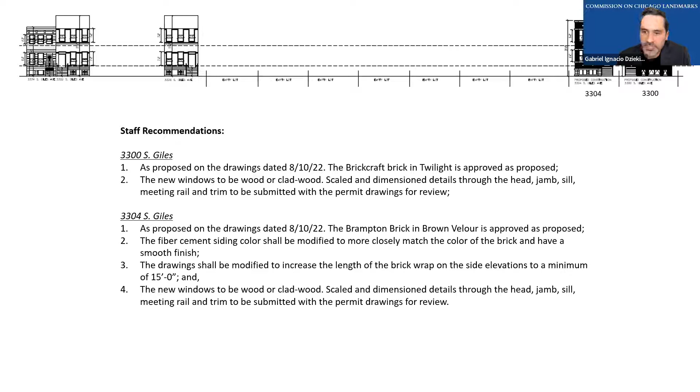I would request a motion to approve the staff recommendation and modify it to have another look at the elevations per the comments made today. I've seen in the past where we could have that done at staff level, or a commissioner could be assigned to be part of that process too. And Joyce, I'm happy to help if you need a commissioner's opinion. Great, thanks. Commissioner Hughes, that's great.

Does someone want to- I motion us to accept the staff recommendations with the addition of another staff level review for the front facades of both of these buildings in the near future. And I, Commissioner Hughes, am happy to step in with Joyce to work with the developer on that.

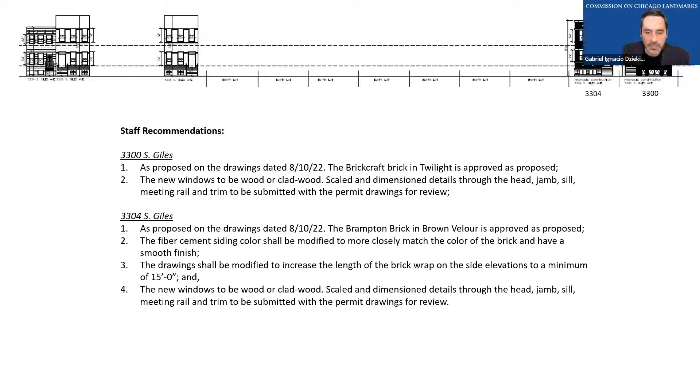Excellent, Commissioner Hughes has made a motion. Do we have a second? I'd second that, Commissioner Fair. Commissioner Fair seconded, and we'll do the roll call. Commissioner Ponce?

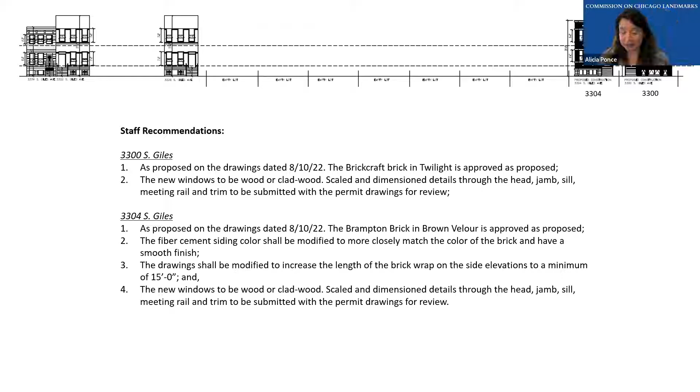Commissioner Ponce is a yes, and Commissioner Rubin, definitely yes. And I'm a yes as well. So the motion carries unanimously. Again, thank you for your commitment to the community, and we really look forward to what you come up with.

Moving to our final project on the agenda, 3321 South Prairie in the Calumet Giles Prairie District, Alderman Sophia King, 4th Ward, proposed new 2-story single-family residence and detached 2-car garage. Joyce Ramos has this one as well.

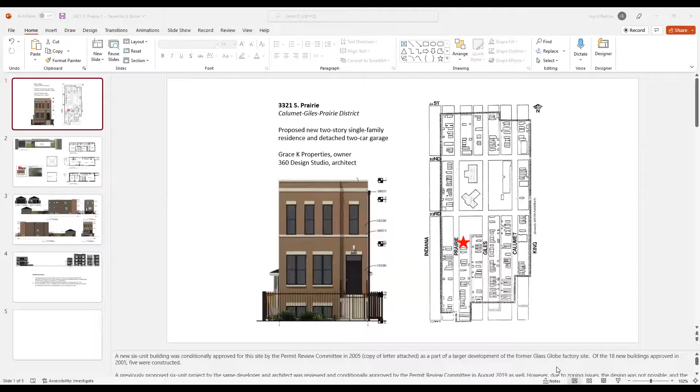Sorry, I'm still trying to pull this one up here. This is... okay. Oh, there it is.

So 3321 South Prairie. This property is also located on the same Glass Globe development site as the last project that we just discussed.

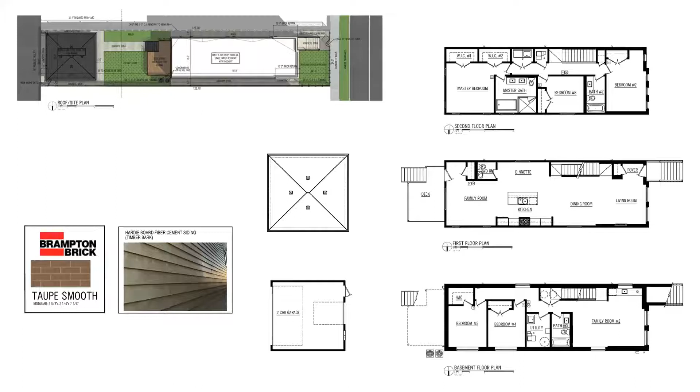The building has a raised entry with a stoop height of 5 foot 4 inches above grade, and the windows, doors, and stoop heights are similar to other historic structures in the district. Punched openings on the front facade contain single double hung windows with stone sills and lintels.

Historic preservation staff recommends that all new windows be wood or clad wood, and that scaled and dimensioned window details through the head, jamb, sill, meeting rail, and trim be submitted with permit drawings for review.

A limestone cornice with a slight projection and limestone coping is proposed to cap the building. The front elevation is clad in modular size face brick in a taupe color with a 10-foot wrap on the north and south elevations. At that point, the material transitions to a fiber cement siding, proposed in a timber bark color, which is approved and shall have a smooth finish.

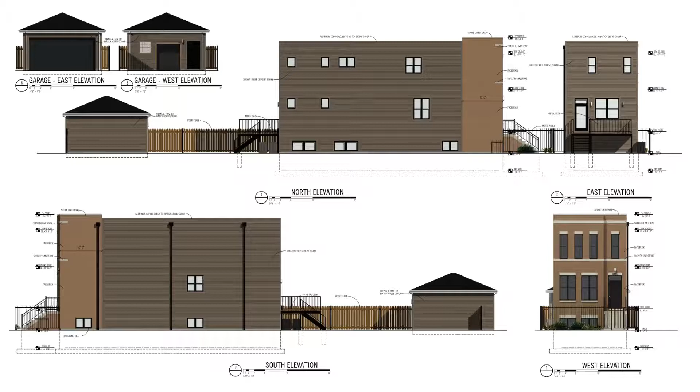Since the side elevations would be visible, staff recommends increasing the length of the brick wrap on the side elevations to a minimum of 15 feet.

So that really concludes my presentation. Similar to the last one, the alderman and the community group have also reviewed the proposal and provided letters of support. The architect and the developer are both here. Please let us know if you have any questions.

Thanks, Joyce. Any questions for Joyce or staff from commissioners? Seeing none, can we please hear from the developer, Mr. Tom Boney?

Hello again. Yeah, this house is opposite of the other two that were just introduced. We've got a strip of land facing both Prairie and Giles, and it's one there. I'd like to add, on the question before, on these other lots we do have to come back in, and we wanted to go with these 3 homes because we have egress to them. We're working with the city on dedicating an alley here so we can get the rest of this lot developed, and that's why you haven't seen all the designs yet until we can get the alley rededicated.

Interesting. Thank you. Commissioners, any questions? Seeing none, any points of discussion on this project? Seeing none, if there's no further discussion, I'd like to request a motion to adopt the staff recommendation for the project. Do we have a motion?

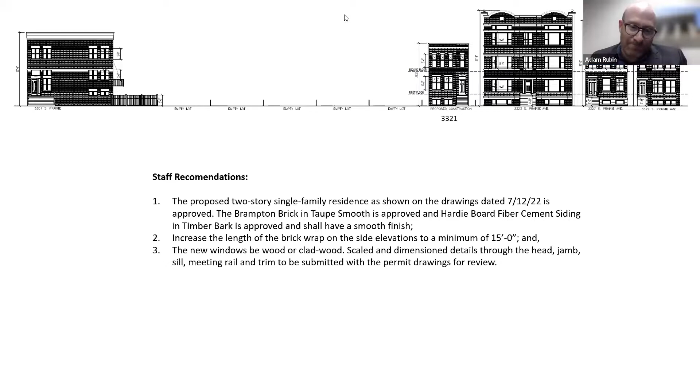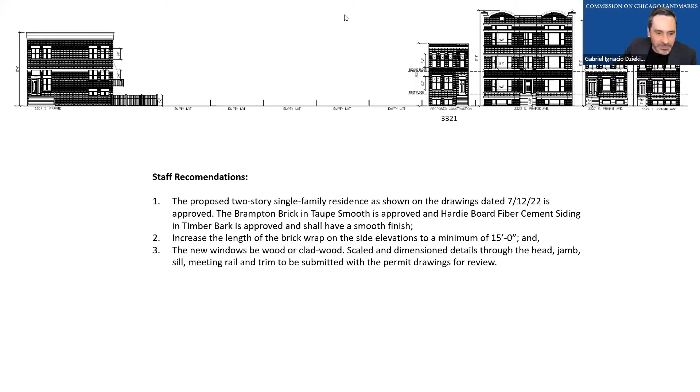So moved, Commissioner Rubin. Commissioner Rubin has made a motion. Do we have a second? Seconded, Commissioner Fair. We'll do the roll call. Commissioner Hughes, I'm a yes. Commissioner Ponce, yes, Commissioner Ponce is a yes. I'm a yes. And the motion carries unanimously.

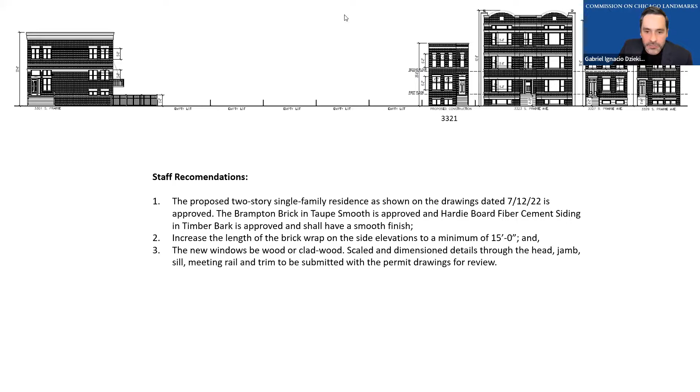Congratulations. We look forward to seeing the rest of the lots as well. That brings us to the end of our agenda today. There being no further business, I'd like to request a motion to adjourn.